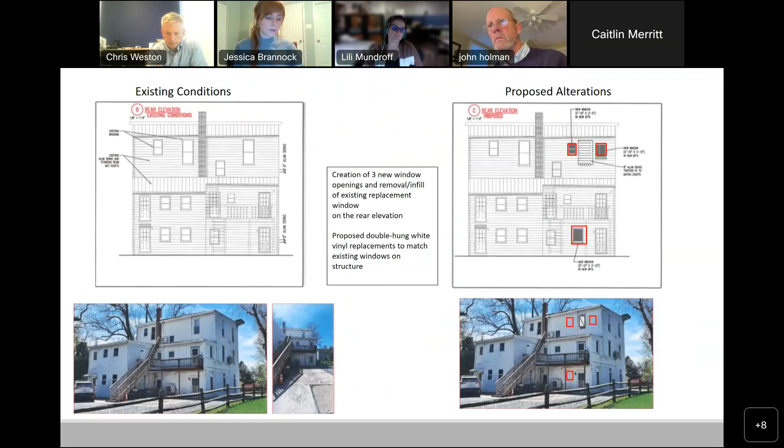Commission members, are we all okay with the consent agenda, or does somebody have any questions about any of those items? Hearing no questions, may I have a motion to approve the consent agenda items as presented?

So moved. Thank you, Ed. A second? Second. Thank you, Lily.

And then we'll do this by roll call vote, right, Jessica? Yes, could I please have Phoebe? Yes. Jamie? Yes. Ed? Yes. Scott? Yes. Lily? Yes. Ray? Yes. Chris Weston? Yes. And John?

And Chris Park has now joined us. Oh, Chris, great. Joined late. I'm seeing that Wendy is also with us. Yes, I'm here too. Welcome, Wendy. Welcome to both of you. Thank you. And also yes for me. And I also approve it.

So the consent agenda passes. Great, thank you. And then we will continue with the regular agenda, the final actions summaries.

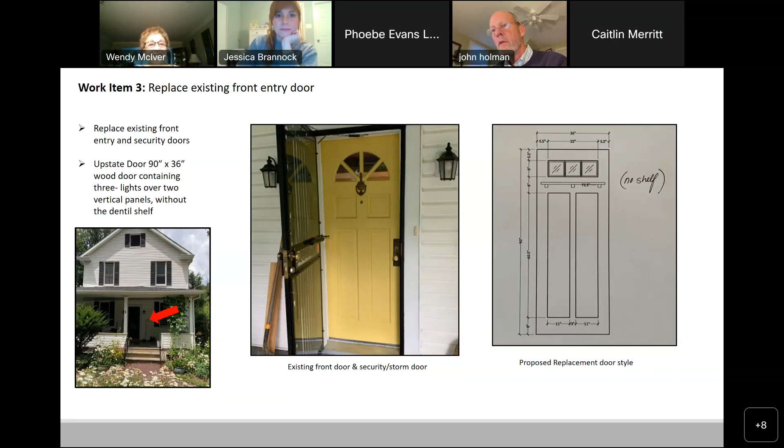So, any other questions, commissioners? Hearing none, do we have a motion? And keep in mind, we're trying to include the door in the motion.

Yeah, I'll offer a motion. I make a motion to vote to issue a certificate of appropriateness for work item 1 and 2 as proposed, vote to issue a certificate of appropriateness for the removal of the security door as proposed, and vote to issue a certificate of appropriateness for the replacement of the front door on the condition that the style is approved by staff.

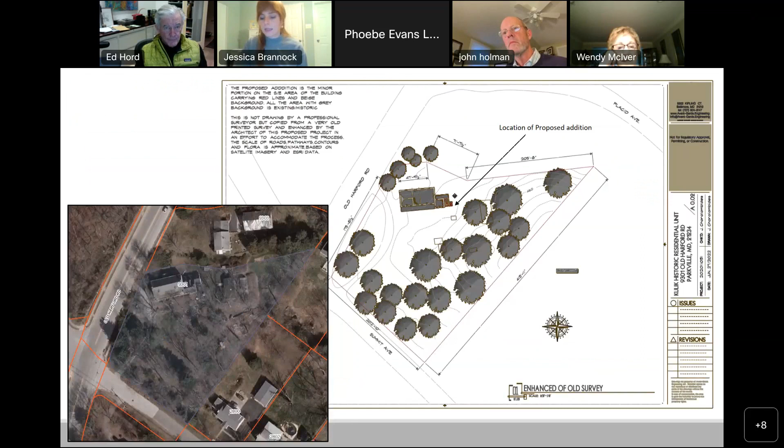Okay Jessica, are you on for number 6 here? Agenda item number 6, this is the Kulik property at 9301 Old Harford Road in Parkville, County Council District number 3. This is final landmark number 244, Club Hill House. The property owner is proposing to expand a portion of an existing one-story board and batten 1970s kitchen addition located on the southeast corner.

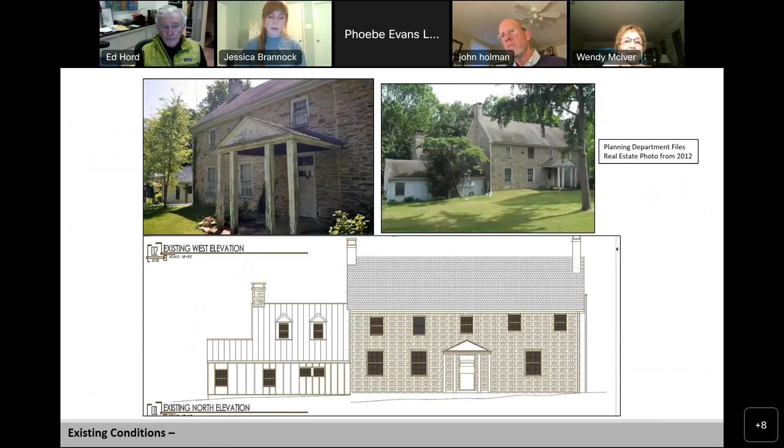This proposal originally came before the commission at the April 14th, 2022 meeting of the LPC. The LPC voted to not issue a certificate of appropriateness or notice to proceed for the April 2022 proposal, as they felt the design did not meet our design guidelines and asked for better drawings, more photos, and an improved site plan to help them orient themselves with the property and structure.

The commission and staff provided the following comments: to drop the roof height slightly and set the building line back from the historic stone block of the house, aligning windows, reducing the number of windows. A labeled site plan that shows all structures, property lines, streets, neighboring houses, location of the proposed addition, location of driveways, photographs that clearly show the entire structure, and clearly labeled elevation drawings and plans that show existing or proposed conditions showing the entire structure.

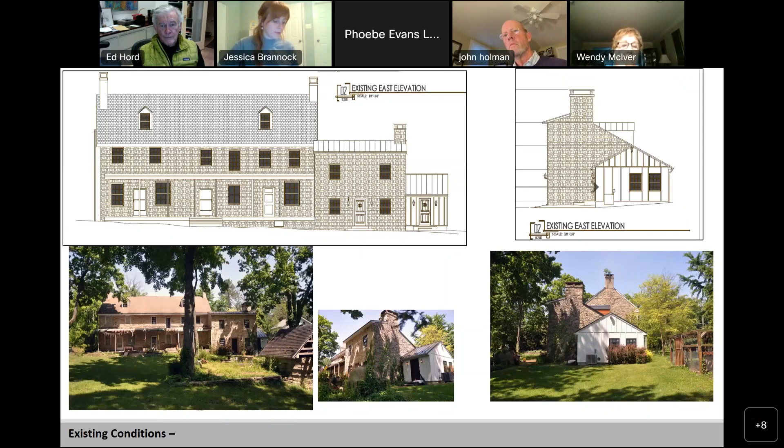The applicant has returned to the commission with revised plans and additional photos that address the commission's and staff's comments from April 2022. The proposal is extending the footprint of the existing addition and adding a second story. The addition will consist of a mudroom and staircase on the first floor and storage on the second. It will be clad with 3/4 inch pressure-treated plywood with 1x3 strips to create a board and batten pattern to match the existing irregular pattern on the first and second stories.

The proposed windows are 6/6 double-hung Pella black aluminum clad divided lights. The window style will match the others on this addition. The applicant wishes to add a salvage schoolhouse bell on the black standing seam metal roof. The existing entry door will be reused.

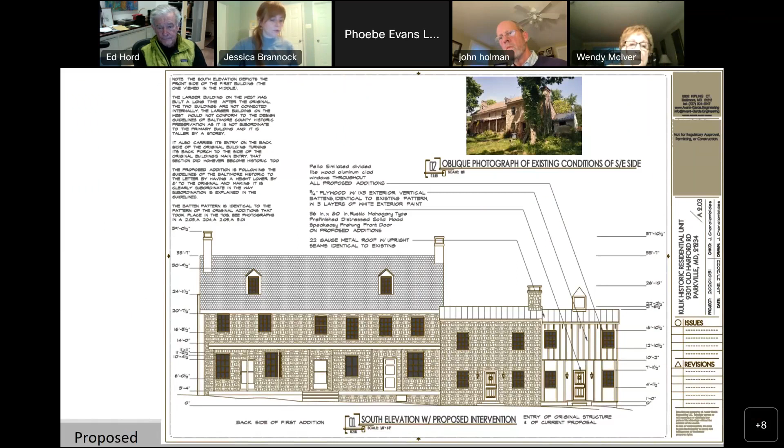The overall roof height has been dropped by 8 inches and is set back from the building line of the historic stone portion. The drop can be seen in the proposed south elevation drawings, but not the north and east elevations. It appears that the drop is only on the rear and not the front. The number of windows have been reduced on the east elevation from 2 on each floor to 1 on each floor. The north elevation window was moved to the first floor and aligned with the other windows on the existing structure. The irregular board and batten spacing will be matched on the proposed addition.

Staff notes the way the structure is oriented on the property. The location of the addition on the southeast corner is facing away from Old Harford Road. The most visible portion of the house is the northwest corner. The proposed addition's location and heavy tree cover, depending on the time of year, it will not be very visible from the public right of way.

Staff is accepting of the general location of the addition as it is an expansion of an existing addition. Staff notes that while the irregular pattern board and batten is not typical and looks out of place, the pattern is following what already exists. Staff encourages the commission to discuss the roof height drop, which only appears to be on the rear roof slope, not the entire roof. In addition, staff encourages the commission to discuss the visibility of the addition and take that into consideration when making a decision.

Staff recommends to vote to issue a certificate of appropriateness or notice to proceed, citing Baltimore County Historic Design Guidelines, Additions and Infill, page 3, County Code Section 32-7-405.

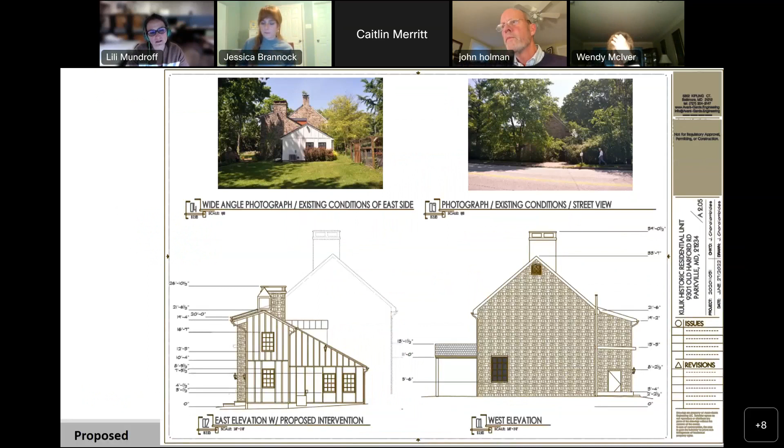One of the comments I had was, I think I see the drop of 8 inches in both front and back, but because it's so minimal, it's really hard to see. If you compare the two, it's shown that it's dropping from the existing ridge line. It's just really minimal, and that's why it's hard to tell.

I wanted to bring up the fact that the addition, although it's building on the existing addition that is there, it's starting to compete with that volume, the stone volume. Though there's an attempt to reduce the roof height, it's just not enough. 8 inches does not seem like enough, especially when you're in the field trying to line up things, it might end up being even less than that. Also the cupola now really competes in height with the existing stone chimney.

So maybe there's a consideration to lessen the roof by a little bit more and also remove the cupola, not have it be there. I don't know. Other commissioners, how do you feel about those comments?

Well, I think the cupola is actually a bell, right? That he wanted to preserve. So it's not just for show, it's for a purpose.

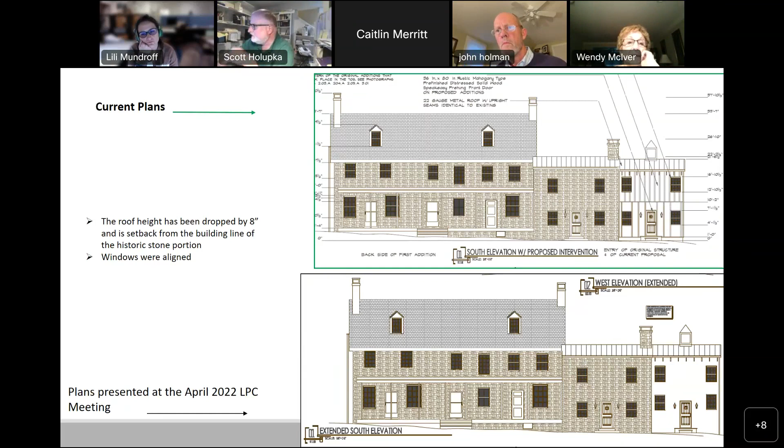Well, I was looking from the Google Earth view. As was noted, it appears that this whole addition is sort of far away and not really visible. The lot looks heavily tree lined. I just don't know that it matters a whole lot in terms of the look of the house that you can barely see most of the time anyway.

Just going back to the reasoning for dropping the roof line, that was to distinguish it from the original roof, is that right? Yeah. And my guess is that if you drop it any more, it makes the interior spaces largely uninhabitable or not very useful.

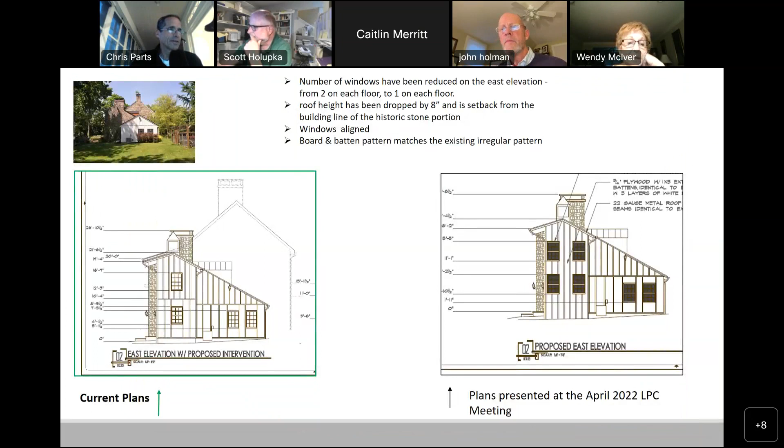I'm just wondering whether that's really that significant. I think what's visible on the house is the front, where you see the addition and the separation of the stone, and I'm not sure there's significant value to that on the rear. I'm certainly not opposed to having that, but I'm just not sure that's something that's terribly significant.

Any other thoughts or comments? So what I'm hearing is, while we may not be excited about the particular addition, we find no particular objection to it at the present time. Is there somebody who would like to put that forth in a motion, if I'm capturing the sense of the group?

Well, I move that we vote to issue a certificate of appropriateness and notice to proceed. Thank you, Scott. A second? I would second that. Okay, thank you, Chris.

Could we please have Phoebe's vote? Yes. Jamie, yes. Ed, yes. Scott, yes. Lili, yes. Ray, yes. Chris Weston, abstain. Chris Parts, yes. Wendy, yes. And John, yes. Thank you.

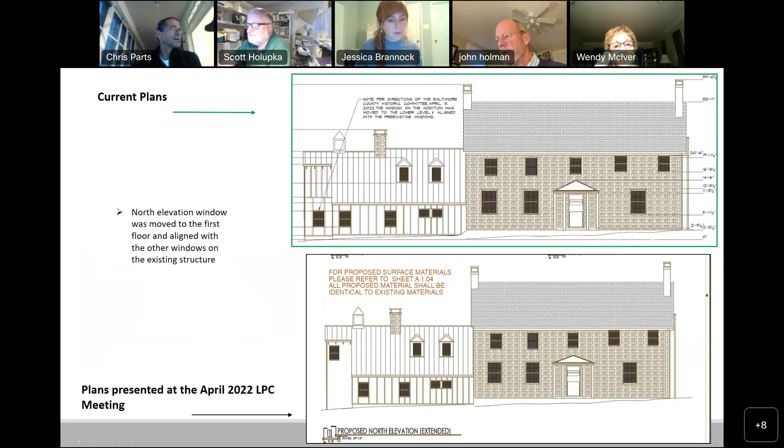Right, next we have agenda item number 8, the Francis property. This is located at 510 Sudbrook Lane in Sudbrook Park, County Council District number 2. It's a contributing structure in the Sudbrook Park County Historic District and Sudbrook Park National Register Historic District.

The homeowner would like to remove an existing 12 by 18 ground level deck and replace it with a new 20 by 30 deck elevated 8 feet above ground, with the underneath portion of the deck to be used for parking. The deck is to be located off the rear of the home, which sits on an approximately 1.2 acre lot. This proposal was previously submitted to the LPC and reviewed at the February 10th, 2022 meeting.

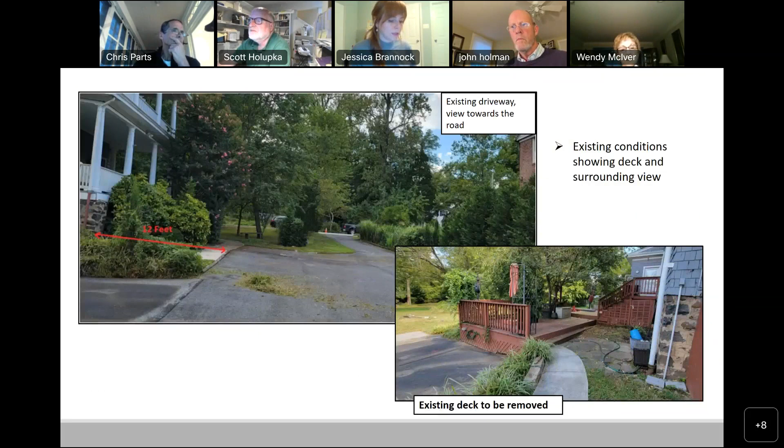The commission voted to not issue a certificate of appropriateness because the design did not meet the county design guidelines. The commission recommended that the applicant revisit the proposal with the following suggestions: take cues and details from the main home and existing porch rather than the existing deck, and tie in components of that to make the garage or elevated deck less visually striking. Review the Baltimore County Historic Guidelines and look at other homes in Sudbrook Park to see how the proposal could be improved to better fit within the district and its character.

In addition, the commission felt that the February submission had insufficient information and asked that the applicant provide the following items when the proposal returns: a complete site plan showing existing and proposed property conditions, including all driveways, walkways, structures, property lines, and streets; complete elevation drawings that fully show the proposal and its relationship to the main house; and additional information on how the proposal is consistent with the district. A simple site plan was included, as well as engineering plans that show partial elevations and photo simulated renderings.

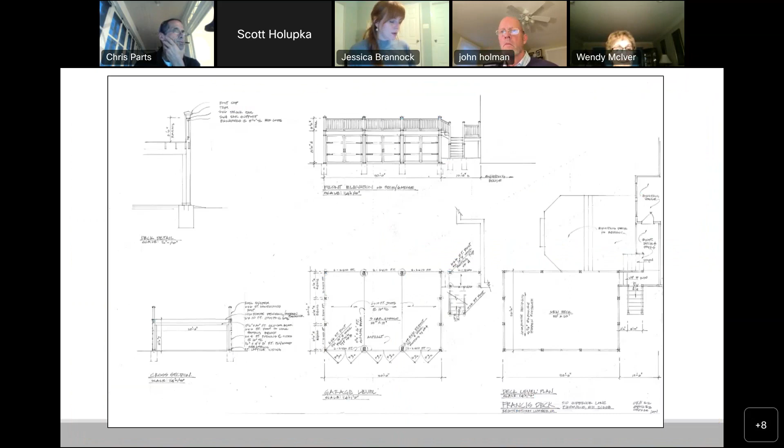The current proposal is identical to the previous submission in size and location. However, from the submitted renderings, the proposed siding color and material has been updated to match the existing color of the main house, using shingles instead of lattice.

Staff notes some inconsistencies between the engineering drawings, the simulated renderings, and materials list submitted. The details from the engineering drawings include: the deck structure will be constructed of pressure-treated pine, adjustable steel jack posts, and PT glulam beams with concrete footings. Asphalt will be laid at the base to support vehicle storage.

The sides will be sheathed in plywood covered with shingles on 3 sides, and 3 entry doors will be placed on the front facade. The proposed height of the deck is 8 feet with an additional 3 feet deck railing, for a total height of 11 feet. The deck floor will be covered with composite decking board material.

The applicant did not provide a clear narrative description of the proposed work that outlines the correct exterior material information. The list provided and the information on the simulated photo renderings are not consistent. Staff asks the commission to clarify the exterior materials that the applicant is proposing and that they are updated on the plans to reflect what is to be built.

The Sudbrook Park Landmarks Committee has reviewed the proposal and raised several concerns on the structure's size and compatibility with the neighborhood and historic home, but some of these were addressed via email and they unanimously voted to support the project. A copy of this letter was included in your meeting materials packet.

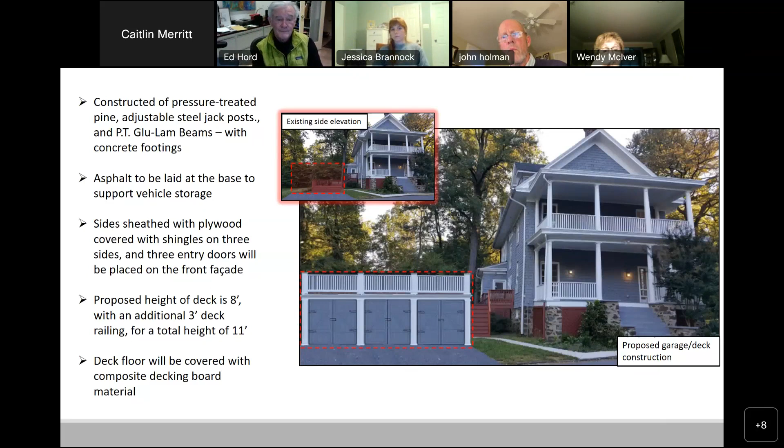Maybe you do - the drawing has that, the drawing has the right measurements. So on top over here, sections - let me see, if you can blow this out, the drawing on the center top, which was done professionally by the Reisterstown Lumber Company, you see that it says 8 feet, and then on top of that...

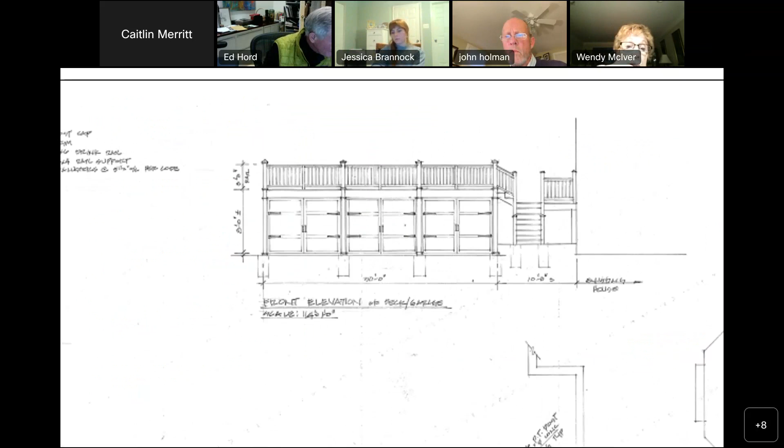Yes, the upside down thing. Okay, yes, 8 feet. Because of COVID, they had a broken machine and it had it upside down. Yep, now it's right side up.

So if you can blow that up, you see it says 8 feet over there, all the way to the floor of the deck. So I think, Ed, to your point, you would probably end up with a 7-foot bottom of framing. This elevation shows that more than the other - I was always looking at the other one, which shows no dimension. That's right, this has enough room for a dimension of structure.

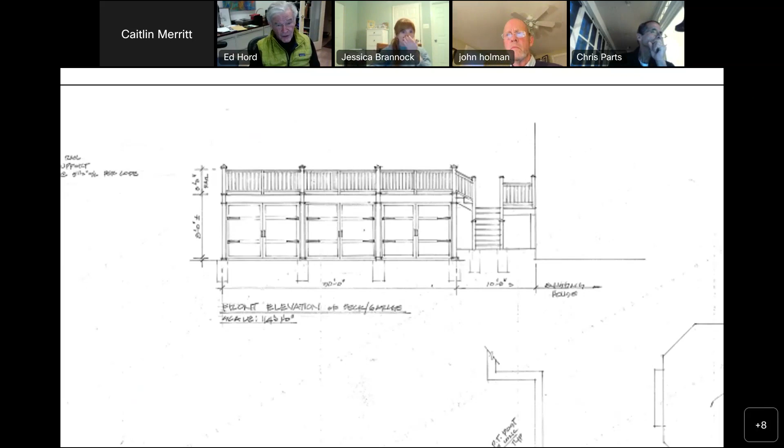I'm very concerned about having just a tongue and groove deck and nothing below it - I think you're asking for trouble. It won't last long. Water will drip through, water will leach through onto the interior walls, and if you have vehicles in there, I hope you don't care about the finish on them. The other thing I care about is the walls, which I think are going to rot relatively quickly inside.

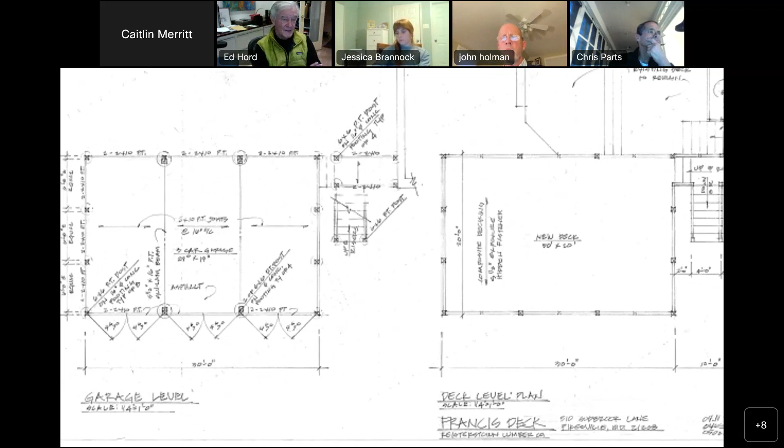Because there's no waterproofing on the inside part of those walls, and there's water dripping down the face. So I think someone who knows construction really ought to help you with this, because my concern is what it's going to look like 5 years from now - it's going to start rotting and become an eyesore in the neighborhood.

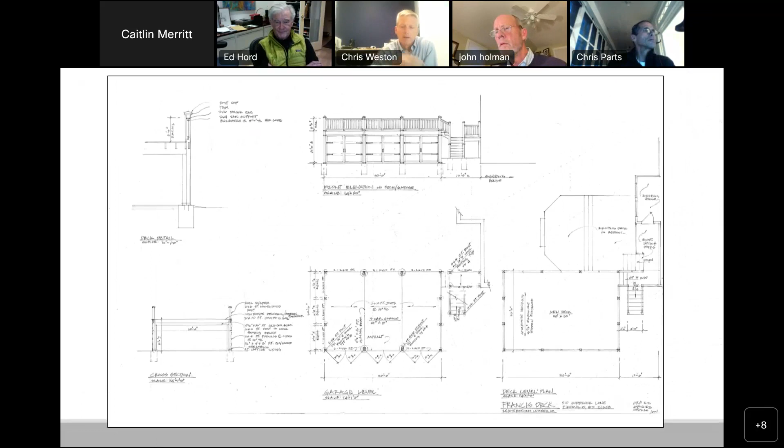So that's my concern. I'm going to jump ahead and say that this doesn't comply with zoning, because this is an accessory structure that is not located behind the rear foundation line. So this is all going to have to go through zoning and get a variance to be constructed, at which point you're going to need a full set of architectural drawings. So I guess go ahead and get started with that.

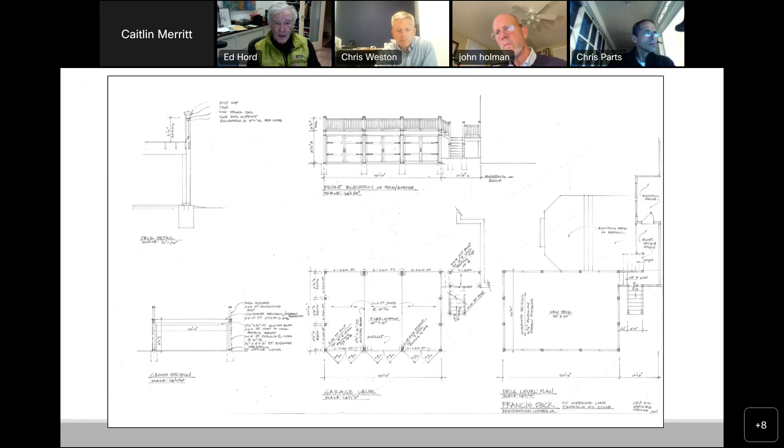And I think nothing shows what the material is on the other walls except one Photoshop rendering, which shows shingles - it looks like cedar shingles at an angle. So I don't think that's what he really wants to do, I think that may just be an artifact. Yeah, it's okay.

If all faces have the shingles on it, that'd be interesting, but it would be nice to show it in elevation and show it with the house, so we show how it relates to the house. I just think there's not enough here.

I'm not comfortable approving this. Any other comments from other commissioners? It's an accessory structure trying to pass as a deck.

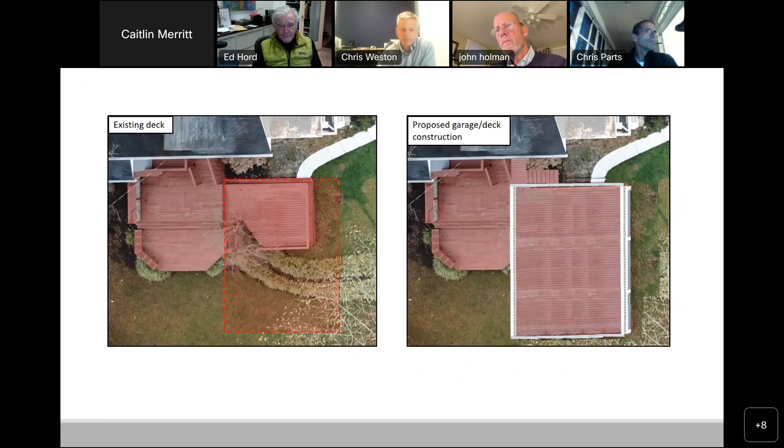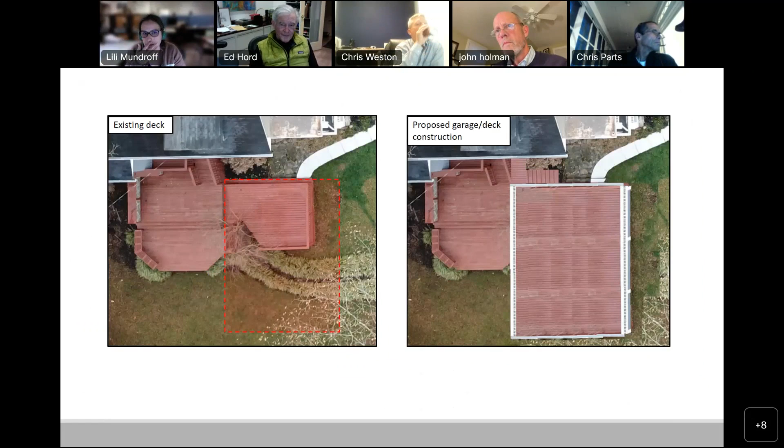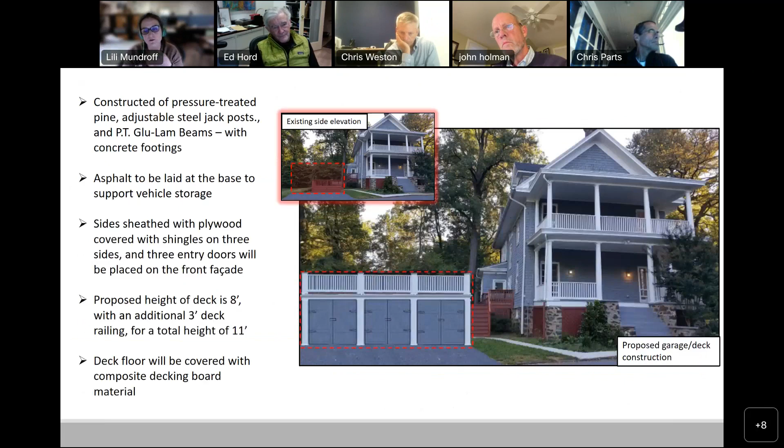I would like to add on to that same notion, that the drawings in fact call it a deck and a garage. And it's clearly a garage because you're parking cars there. So the zoning is important, and if LPC was to consider this as a garage, the whole additions and guidelines for additions and infill, and how the face of the garage sits behind that side elevation, is important.

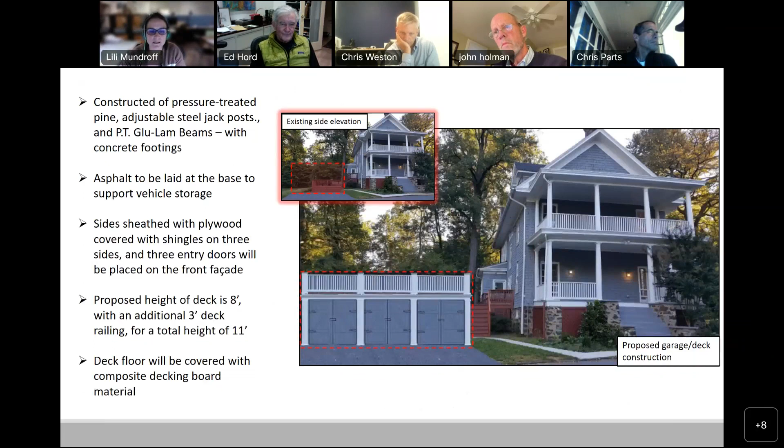I think you're not including here that there is an existing garage 90 degrees from this. Yes, I think that's critical in terms of understanding what's going on between these two. And if we consider the height of the doors, like Ed was mentioning, and the structure, and then the decking, you're really going to be much taller with that railing. So the relationship between the side porches of the house and this deck in the back is going to be very different.

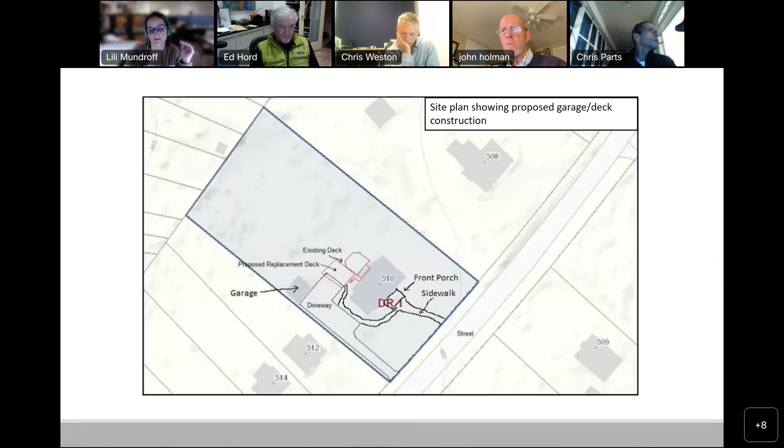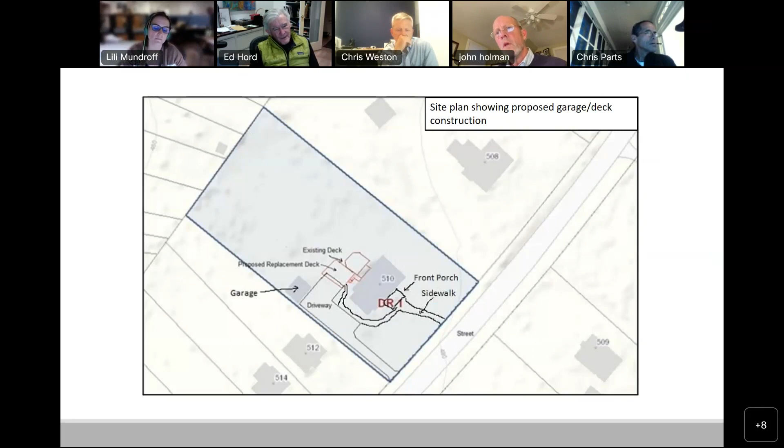It's off on zoning first, by about 6 to 8 inches. You might find out you'll be more off once you know the structure, because you might need deeper LVLs with those whole big doors going through there. So maybe go with zoning first, see what happens with the whole garage.

I would not call it a deck if it has enclosed space underneath with cars parked there. So, one other question: are there steps up to the deck on top? I don't see how you get up. Oh, I see, maybe those are the plan steps up. All right, gotcha.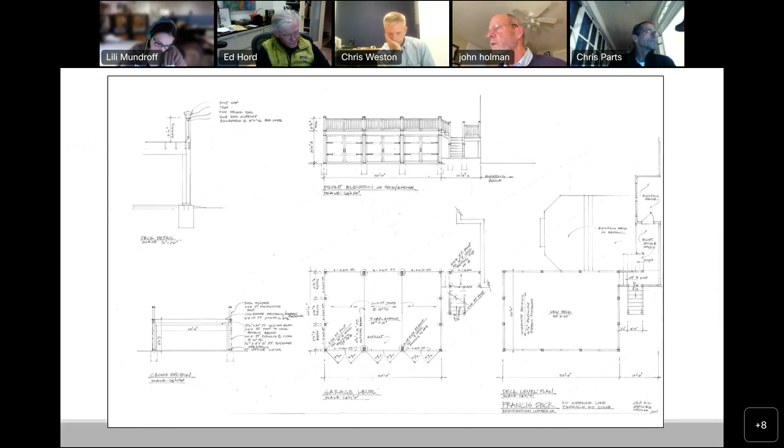All right, so I'm hearing some sentiment from the commissioners to follow staff's recommendation, with some advice, Mr. Francis. It might help you in putting this together in a more complete fashion, and also prevent you some problems with zoning, and maybe have a conversation with them as well.

So is there a commissioner who would like to present a motion? I'll make a motion. The motion would be to not issue, to follow staff recommendation and not issue a certificate of appropriateness. Good, thank you. And a recommendation to follow up with zoning first, as a side recommendation. Good, thank you. And then a second for that? I'll second. Thank you, Wendy.

Jessica, can we continue to the vote? Phoebe, yes. Jamie, yes. Ed, yes. Scott? Are you unmuted, Scott? You're muted. Thanks. Lily, yes. Ray, yes. Chris Weston, yes. Chris Parts, yes. Wendy, yes. And John, yes. Thank you.

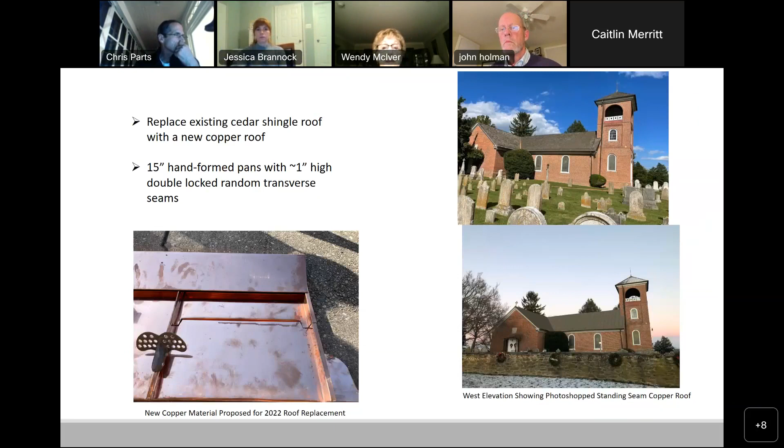And we believe that the copper roof, even though we haven't seen a copper roof on this building before, would be in keeping with the time the building was built. I understand this is a rural church. The example I think of as a church that has a copper roof that was built in the 1740s is Christ Church, Philadelphia. And obviously that was in the middle of a large urban area.

But we're hopeful that we can get approval for a copper roof because it will help to maintain the building into the next century. We're told by our contractor this roof could last us 70 to 100 years. And so we're hoping for that kind of longevity in the roof for the parish and for the building.

We're also mindful that the copper roof is going to be more expensive than cedar, though cedar is quite expensive these days. Normally if I were approaching a project like this, I would think copper is out of our range of financial ability. But cedar is so expensive these days that the price points are pretty close. We're $20,000 or $30,000 more to put the copper on than cedar. So the pricing is interesting these days, and it has helped us to think, well, if we could put copper on, that would really, really help to maintain the building for a long time.

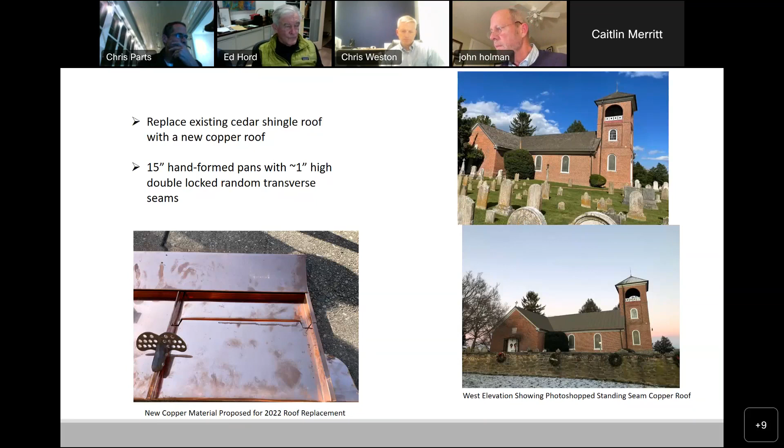I'll make a motion to approve the staff recommendation, to not approve it based on the recommendation from staff. Staff approved it with the condition that the material be rethought to be in-kind wood or aged wood composite.

Seems like we can approve that if they want to go ahead with that, but otherwise, you don't have to follow our recommendations if you don't want to approve the replacements. If they want the applicant to look into different types of synthetic or composite shingles or other alternatives, you can do that as well.

I would say that if you pick the wrong synthetic material, you could be even worse off than doing this in copper. There's a wide variety and grades of synthetic shingles, and some of them really miss the mark because there's not a lot of variation in color, so you get this really monochromatic thing that doesn't resemble a natural material at all.

Yeah, I agree, I'm not wild about the synthetics. So Ed's proposal to approve the staff recommendation is sitting out there without a second, but the other option, as Caitlin offered, is to change that and just say we will not issue a certificate of appropriateness. We can change the motion at this point since it does not have a second.

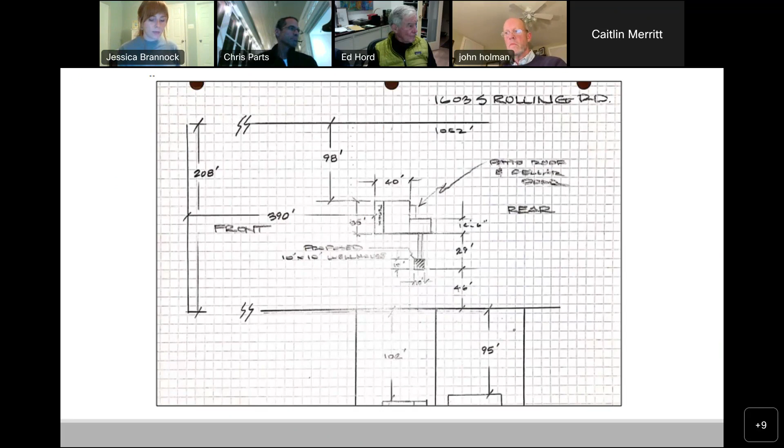And then on to item number 12, Jessica. Yes, this is our last agenda item, the O'Hara property located at 1603 South Rolling Road in Relay, County Council District Number 3. This is a contributing structure in the Relay County Historic District. The owner wishes to add two work items to a previously submitted Part 2 tax credit application that the LPC approved in 2021. The additional items include installing a cellar door and making in-kind replacements to a rear porch or patio roof structure.

So work item number 1 is for the cellar door. The cellar opening is located on the rear kitchen addition. It is currently covered with a makeshift wood door. The applicant is proposing to install a steel Gordon hinge bulkhead door.

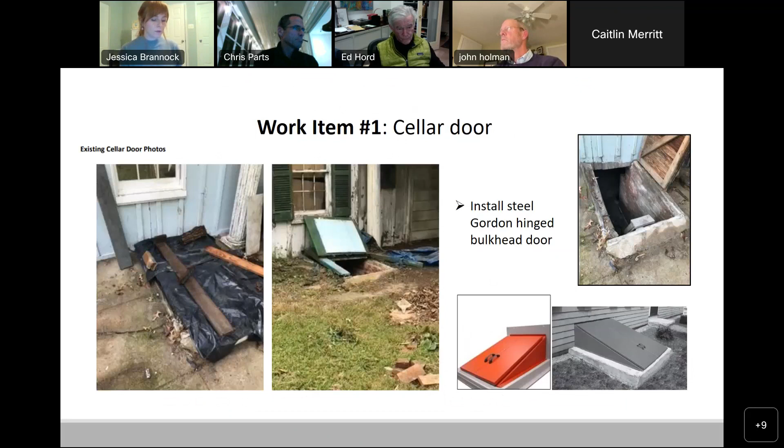Work item number 2 is for the patio roof and columns. The rear patio metal roof and column is located off the rear in the L between the main house and the rear kitchen L addition. The roof structure is currently deteriorated and falling down. There's currently only one remaining wood Doric fluted column, being supported by temporary supports. The applicant wishes to remove the existing roof structure and wood column and reconstruct the roof using in-kind materials. The new roof will be covered with metal sheeting and supported by two new round wood columns. No additional information about the condition of the remaining wood column was provided. From the photos, it looks repairable. The replacement columns proposed do not match the existing - there's no fluting, and the Doric capital doesn't appear to have the dimensions of the design.

Staff recommends conditional approval for work item number 2, that the existing column be retained and repaired, and that the new column match the existing. Staff recommendation is to vote to issue a certificate of appropriateness with the following conditions: for work item 2, that the existing column be repaired instead of replaced, and that the replacement of the missing column match the existing in size, dimension, style, and other visual qualities. Product information about the replacement column shall be submitted to staff, citing Baltimore County Historic Design Guidelines, roofs pages 1 through 13, windows and doors pages 1 through 8, County Code Section 327405.

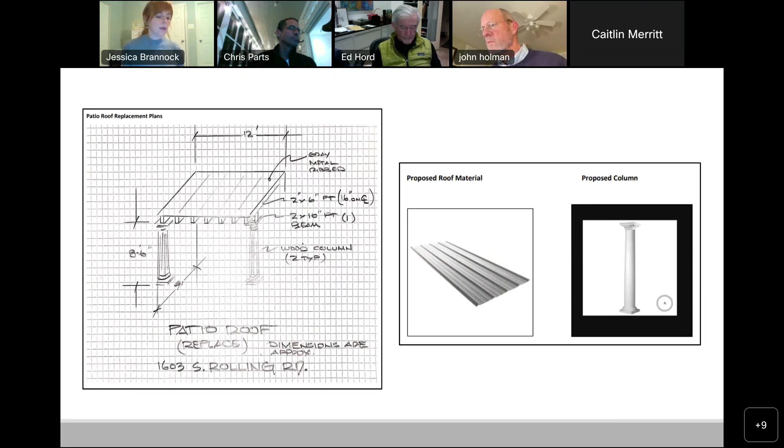Thank you, Jessica. So we have before us the proposal from staff that the column is the main point where they want a review of that and brought into line with the existing column. Any commissioner questions or comments? I didn't see in the application any discussion on what the ceiling of this porch will be, because they will remove it all. So maybe we should write the motion to include our recommendation on replacing it in kind with beaded board. The applicant is online if you would like to ask questions or if he has any clarification.

Oh, thank you, Caitlin. Thank you. Mr. O'Hara, you're unmuted if you'd like to address the commission. Currently it's open, as you can see on the third picture from left to right, and it would remain the same. The sheathing would be plywood beneath the metal roof.

This is Scott. I have a question. What was the roof? Was this whole porch added on at some point? I mean, it just doesn't fit the rest of the house to start with.

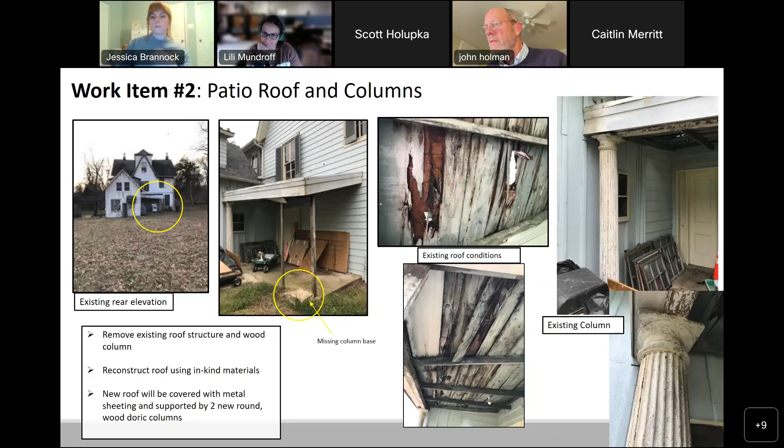Are we ready for a motion? Anybody ready for a motion? Or do we have more to talk about? I can offer a motion.

I would move to follow staff recommendations and vote to issue a certificate of appropriateness with the following condition: that for work item 2, the existing column be repaired instead of replaced if possible, and that any replacement of the missing column match the existing in size, dimension, style, or other visual qualities, with product information about the replacement column submitted to staff.

And I'll add that if the existing column is in such deteriorated shape, the replacement column should additionally match what was there. Thank you. Do I have a second?

Second. Thank you, Jamie. Jessica, can we do a roll call? Phoebe, Yes. Jamie, Yes. Ed, Yes. Scott, Yes. Lily, No. Ray, Yes. Chris Weston, Yes. Chris Parts, Yes. Wendy, Yes. And John, Yes. Thank you.